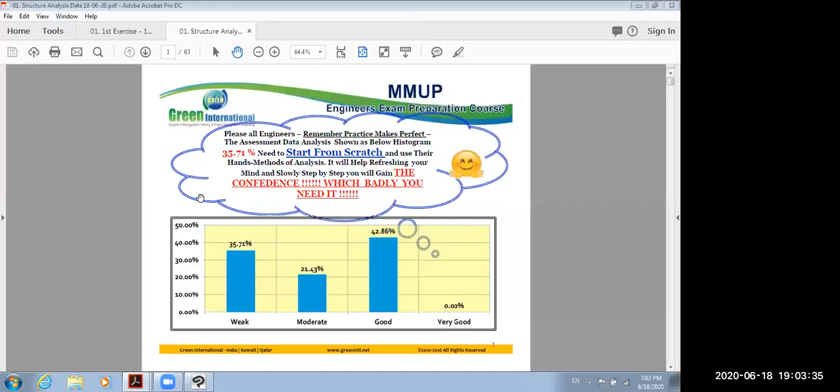I would like to give some, what you call it. Okay, what we have right now, guys, we have on my screen. I have the first exercise. This is the one. Call it first exercise. This first exercise has 16 questions. We need to solve, inshallah, most of them. These are 16 questions we are going to solve.

I told you in the previous class, that's the printed hard copy. I believe all of you have a hard copy now for this exercise. I wish so. What other material are we going to go through? Structure slides. So we have the exercise and we have slides. 01 first exercise and 01 first class session lecture. This is the first one.

And make sure all of you have a notebook, pencil, pen, whatever, and a calculator. Why? We will go through the exercise and solve whatever we can together. I'm going through my screen. I have my pen, my paper, everything here. And we are going to use the slides. Okay, guys? Clear? Please say yes or no. Clear, guys? Let's start. Very good. I am so happy now. Thank you. Let's start, guys, now.

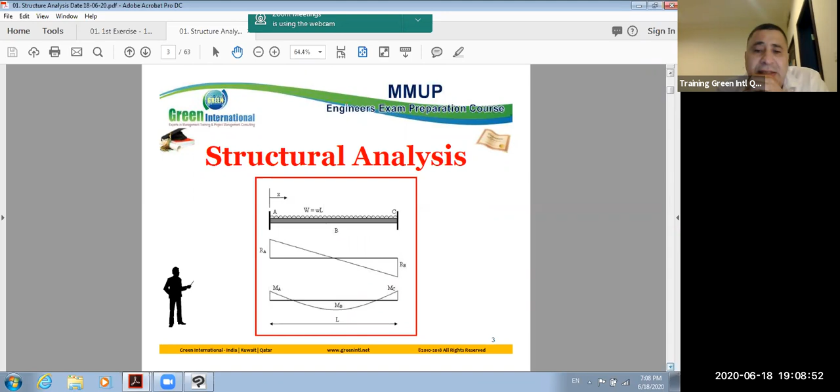Right. Your strategy as a civil engineer, I said in the previous class, I'm going to pass this one. Structure analysis. I am just giving this to refresh your mind. What type of figure do we have? What type of system do we have? We have a fixed end beam, both sides, A and C fixed end. And this is a fixed beam. Okay, very good. Go ahead. Okay, in your mind now, four questions.

Number one, what is structure analysis? Number two, why do you as a civil engineer study structure analysis? A civil engineer without structure analysis is not a civil engineer. Okay. Number three, what are the knowledge areas you should focus on for our exam only? For our exam, we will not go for a master degree in structure analysis. I am going to give you exactly what we are going to focus on.

Number four, what are the structure elements you should focus on? There are these four types of questions. If we answer them slowly one by one, give examples and answer these questions together, you are going to be familiar and refresh your knowledge.

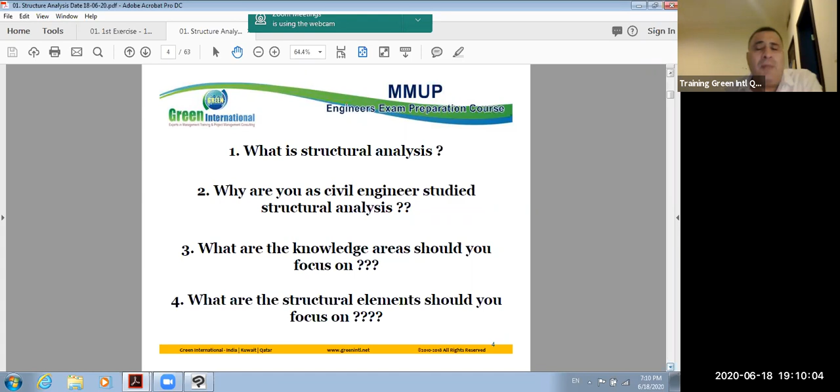Let us see. Number one, your strategy. Don't forget that practice makes perfect. Study on your own and solve using your brain calculation. Don't focus too much on the calculator. Try to enhance your calculation skills, because in your exam the calculator is built into your desktop, and you are going to be in a hurry, always in a hurry.

I don't know if all of you are in the same mood as me. When I'm going for my exam, relax, relax, whatever happens, it will happen. But not all of you are the same. Not every engineer has the same mentality or mood. So from now, exercise how to enhance your calculation skills.

Okay, practice makes perfect. What is your strategy for studying structure analysis, getting the questions answered right and getting the score in your exam? I'm going to repeat it again. Maybe from 4 to 5, even from 4 to 6, questions means a high score. And if all of you solve only these 6 numbers and the project management problems and questions, for sure 100% you will pass.

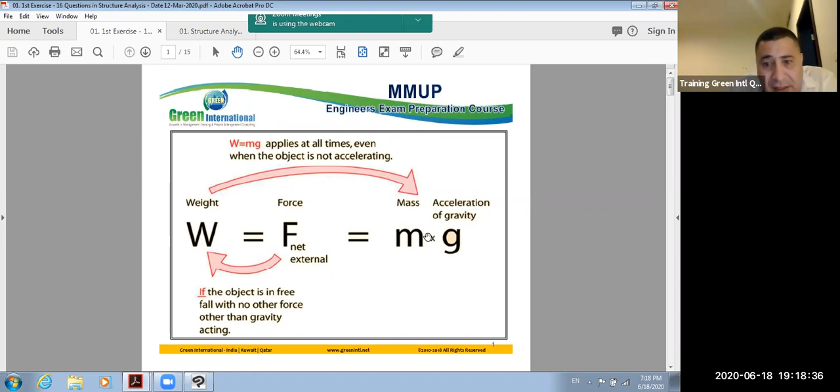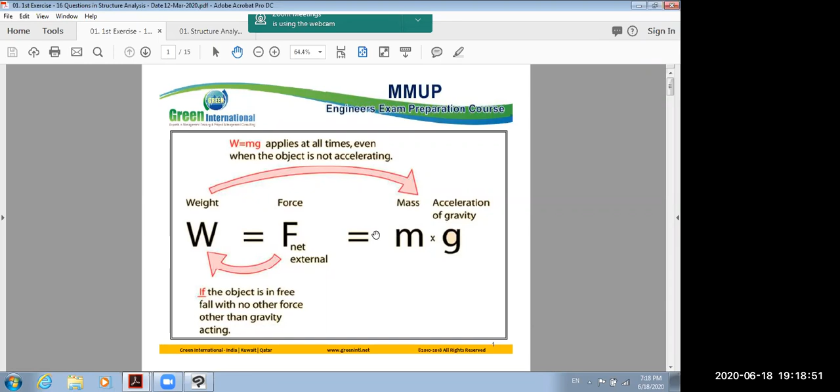Let us go for our exercise. So now we have exercise and we have slides. The first slide is telling you what is the load: weight equal force equal mass multiply acceleration. Try to memorize the formula. Weight equal force equal mass multiply gravity. Try to memorize all the mathematics and the geometry. Okay, question number 1.

Load path is one of the key considerations in structure design, and it is about how to bring the load acting on the building. As I told you, we discuss in this example how the load will transfer from this structure system to the foundation. So now the load path to the building facade, to the ground and the foundation, to the column, to the beam. Take few seconds, guys, and give me the right answer.

By the way, I need all of you to check your score after the session. If we succeed to solve 10, 20, however many questions we answer, try to score yourself. See how many answers are correct and how many are false, and check your score.

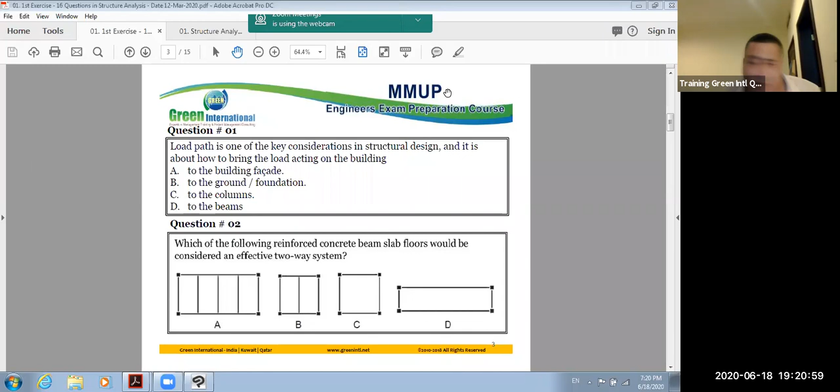Question number 2. Which of the following? Raise hand. Okay, raise hand. Tell me. What is the problem? Shakisa, I am going to unmute. Tell me what is the problem, please. Hello. Shakisa. Hello. Tell me. Okay, no problem. Okay. So now, which of the following?

Number 2. Which of the following reinforced concrete beam slab floors would be considered an effective two-way system? Guys, take your time. We have system A, system B, system C, and D. We have slabs in A. How many slabs we have? 1 slab, 2 slab, 3 slab, 4 slab.

How many beams we have? We have 1 main beam, the second main beam, 2, 3, 4, 5, 6, 7 beams. We have 4 columns. We have in B 2 slabs, and 5 beams. We have in C 1 slab, 4 beams, and 4 columns. We have in D how many slabs? 1 slab and 4 beams.

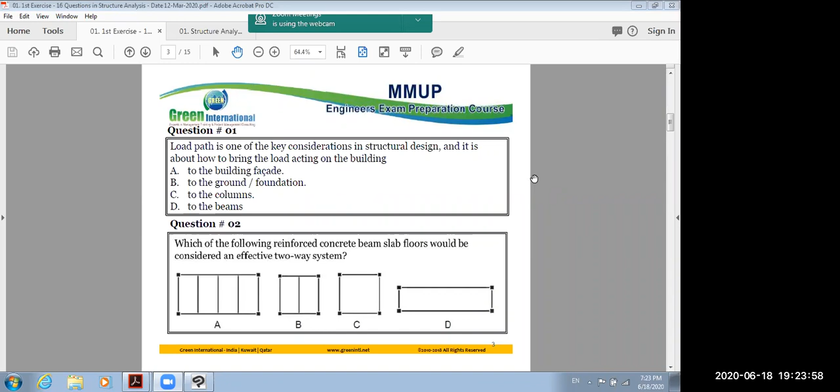Can you hear now? Please type whatever if you are hearing now. If you are not hearing, maybe something is wrong in your system, because I cannot hear you as well. Shakisa, did you hear me now? Please type anything. I am already on my system. Any problems, guys, for all of you? I believe all of you can hear me. Clear here. Okay, no problem. Shakisa, please check in your system and rectify it yourself, please.

Now, okay, very good. Right. So the answer is C. How many score now? 2/2. Very good. 2/2. Okay, let us go for number 3.

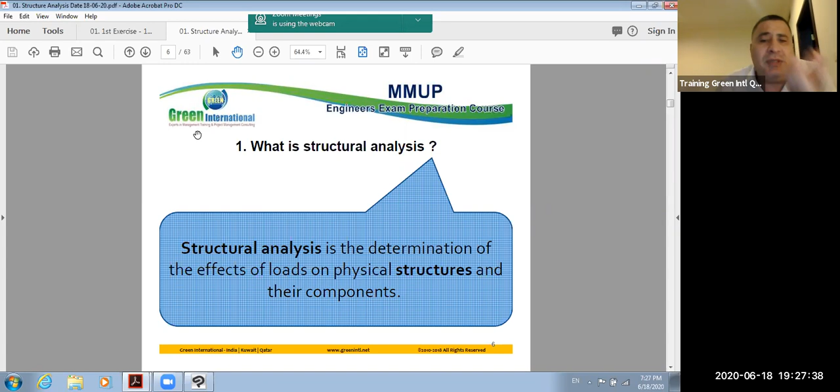Sometimes we have a PEB structure system, and while you have a project, a warehouse, and the system is PEB, you have to get the reaction load from the supplier. If the supplier doesn't have a structural engineer, he will fail to give you the reaction load.

Question number two: why do you, as a civil engineer, study structure analysis? We know now what structure analysis is. Why? Structure analysis is important because it can evaluate whether a specific structure design will be able to withstand the external and internal stresses and forces expected for the design.

Now we will discuss equilibrium and stability. While designing, we need to know the forces acting for sure, 100%. But for PEB structure systems, pre-engineered warehouses, sometimes in the tendering stage they give a particular standard design. During execution, the contract conditions tell you to revalidate the design, and you have a PEB supplier, like Zamil or Kirby or something like that.

You ask him, give me the reaction load, please. He will not give you the reaction load until you sign a contract with him. Anyway, while designing, we need to know the forces. Correct. Very good. Why do you, as a civil engineer, study structure analysis?

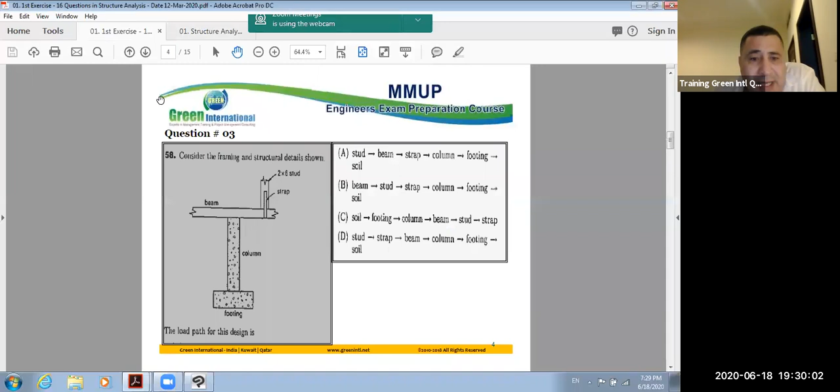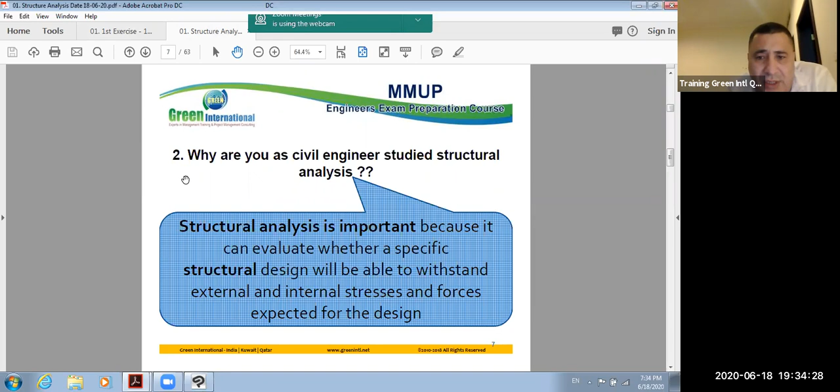Let us see now. Why do you as a civil engineer study structural analysis? Structural analysis is important. We talked about this one. Number 3. Okay, what knowledge areas should we focus on? What exactly is the knowledge area? Question number 1 to question number 2 is structural analysis in general. Now we'll go more specific.

So now, shear force, normal force, and bending moment. 3.1, 3.2: shear forces, normal forces, and moment diagrams. 3.3, statically determinate and statically indeterminate structural elements. We are going to discuss them. Stability of structural elements, which we just started to discuss from question number 2. Deflection and slope of structural elements.

Okay, very good. We'll go for equilibrium. First, let us see what equilibrium is. We will discuss now point number 1, equilibrium and the equations of equilibrium. What's the meaning of equilibrium? Anybody?

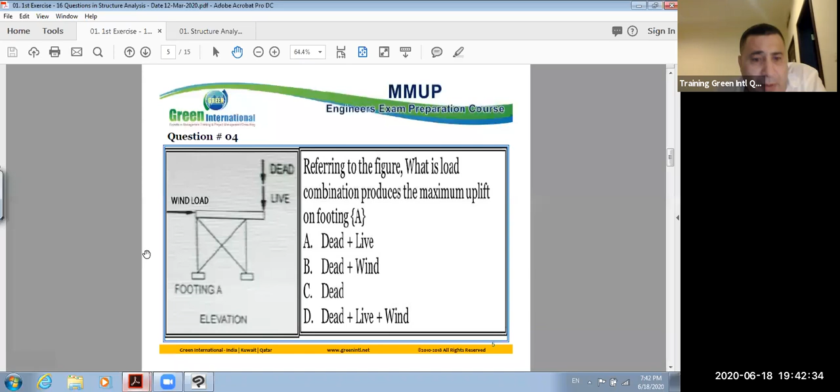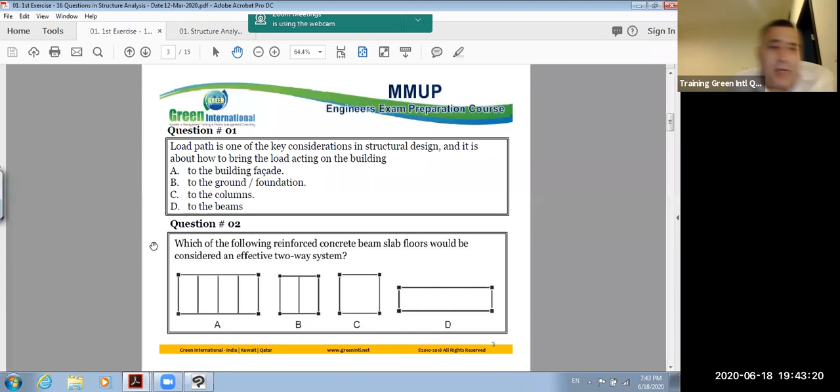So the load path is what? It carries all the weight of the building to the ground. So: to the building facade, to the ground foundation, to the column, to the beams. For sure, 100%, the correct answer is to the ground and the foundation. Okay, guys? Number 1 is clear.

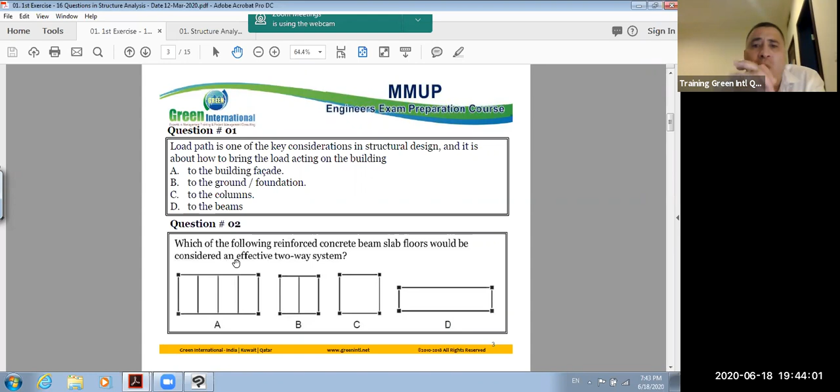Number 2, consider which one is a one-way slab and which is a two-way slab. A slab has length and width. Any slab where the ratio of its length over its width is more than 2, we consider a one-way slab. For example, a slab with 1 meter width and 3 meter length: the ratio is 3 over 1 equals 3. That means this is a one-way slab.

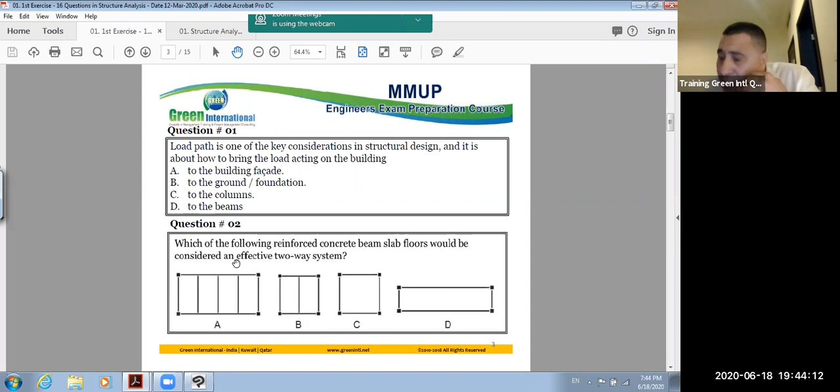Take another slab, 1.8 meter width and 3 meter length. Length over width, 3 over 1.8, is less than or equal to 2. That means a two-way slab. So from A, B, C, D, which one has a two-way slab? As engineers we consider these one-way slabs, and this one a two-way slab. So the answer is C.

I believe now 1 and 2 are clear. Noted? Tamam, alhamdulillah. Okay. Right. Let us go to our slides again.

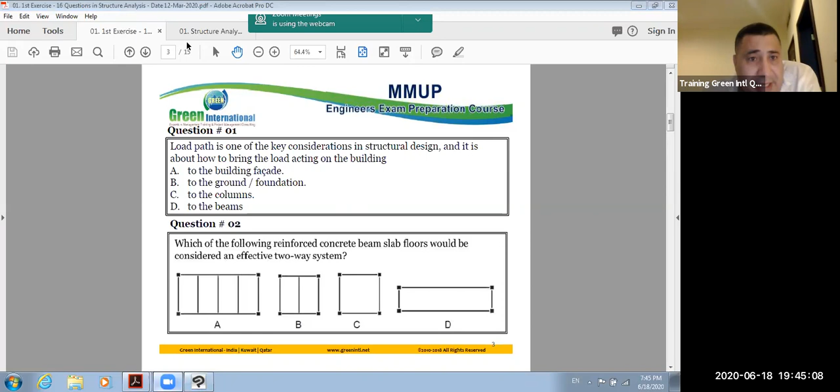Let us go to our exercise. Numbers 1, 2, 3, 4, solved, correct? Number 5, guys. We'll start from number 5.

If all of you solve these questions correctly, an invitation to a 5-star hotel is open now. All of you are invited to a 5-star hotel dinner on me. All of you try to solve this question correctly. I will give you 2 minutes, 13 seconds.

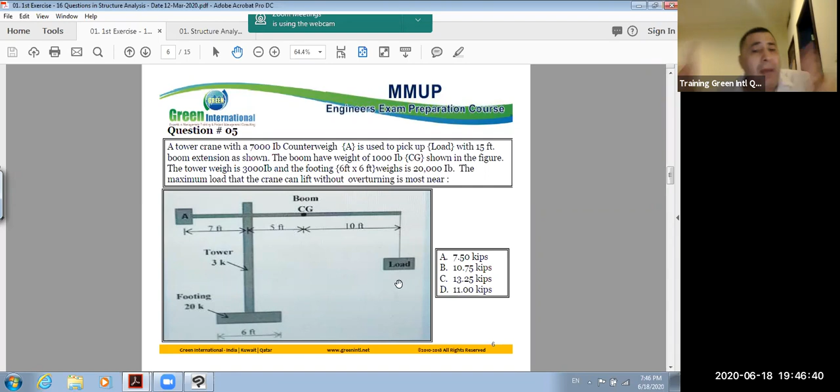Read this question, try to solve it, and tell me what is the maximum load that the crane can lift without overturning is most nearly. Equilibrium, guys, equilibrium, sigma moment at any point should be 0, which I just told you now. Try to solve this question on your own in your notebook. Now, take 2 minutes and 13 seconds. Tell me your answer, please.

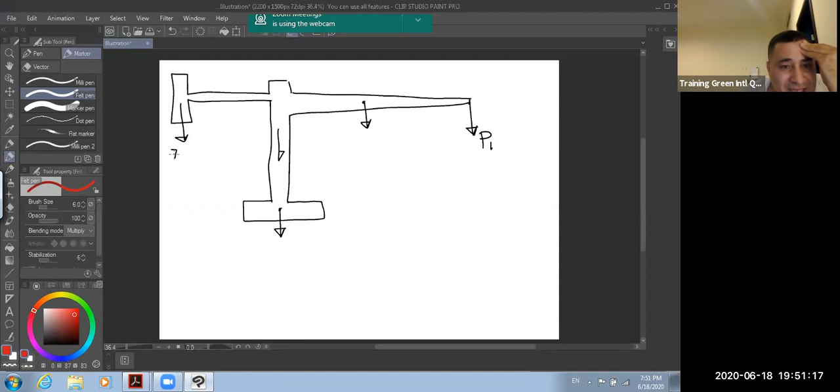Guys, I have a tower crane with a 7,000 pound counterweight. 7,000 pound divided by 1,000, we call it 7 kips. So 7 kips here. This is what we call the counterweight. 1 kip equals 1,000 pound. You have to start now to memorize and refresh: 1,000 pound equals 1 kip. Okay, very good.

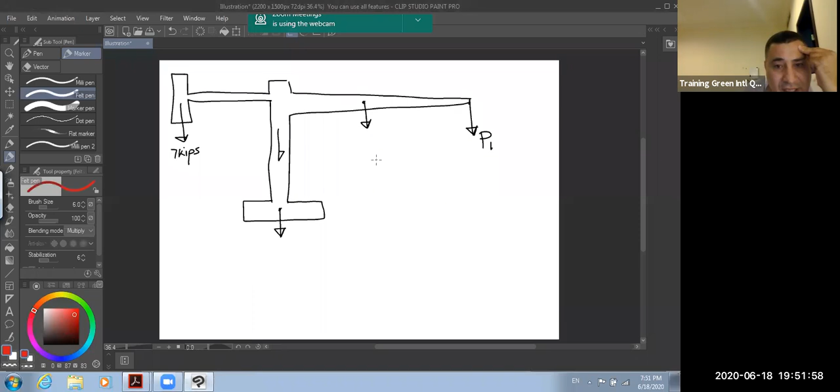And the counterweight is used to pick up loads with a 15 foot boom extension. That means the boom is 15. The CG of the boom is 5 feet away from the post. That means here we have 5 feet. I will check your answer right now. Okay, this is 1,000. 1,000 divided by 1,000, 1 kip. And we have here 10 feet.

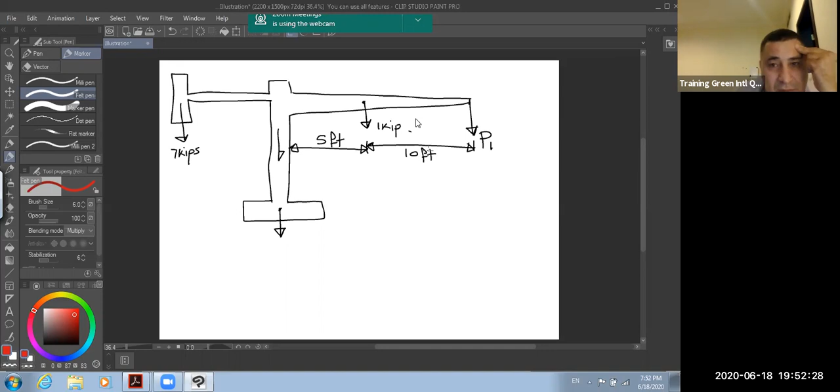Let me check your answer. Can you show the equation again? I will show, don't worry. I will solve this question and I will show you the equation. A is wrong, guys. You failed to get the 5-star invitation from me. That's okay. Let me check the last. D. Oh, perfect, guys. Gobi, yes, this is the correct answer. I appreciate you. Let me solve it for all of you.

We have 1 kip here, and we have P1. P1 is unknown. I need to know it. And the post of the tower crane is 3,000. 3,000 divided by 1,000 gives 3 kips. Here 3 kips. And the foundation is 20,000 pounds. That means 20 kips here. And here is 3 kips.

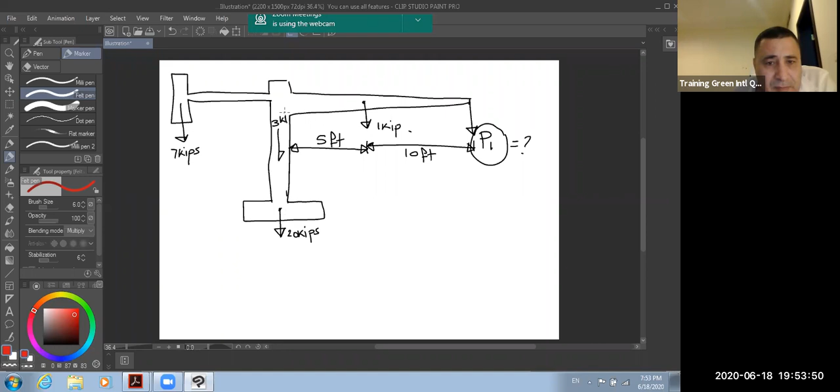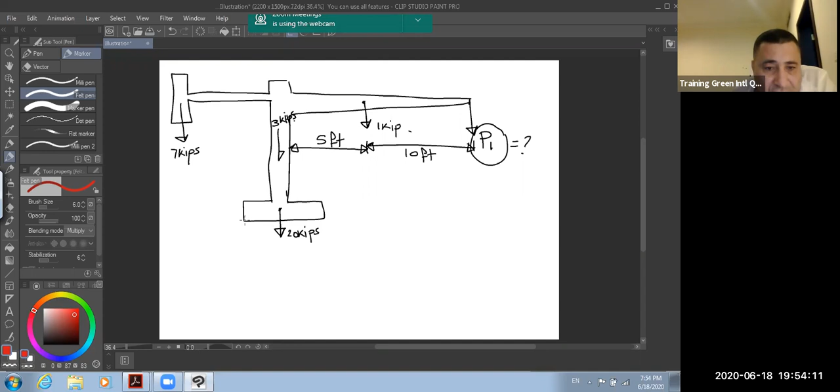And we have 3 points: point A, point B, and point C. What are these 3 points? This is where the foundation contacts the soil. In your opinion, due to this load, what is the overturning point? This load will exceed the limit. The system will overturn in this direction. This is the way of the overturning movement. The whole section will collapse in this direction.

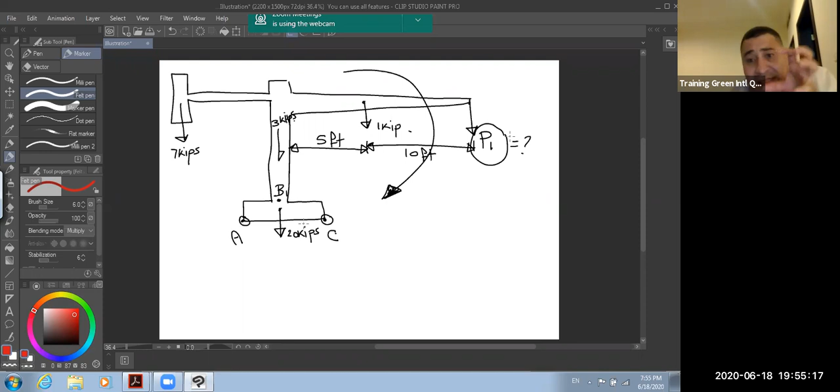Where is the nearest point for overturning? Point A, or point B, or point C? Please give me your opinion in the chat now. Due to this load, the whole system will fail in this direction. What is the arrow now? C, correct. The nearest point where this system will overturn is point C. This is the overturning point.

The system can fail here, yes, but due to what? Failure in the system. If the connection between the post and the foundation is not designed to resist the load, maybe failure happens here. But he told you overturning. He is more specific in the question. Overturning means what? Equilibrium. Equilibrium where we will take a level.

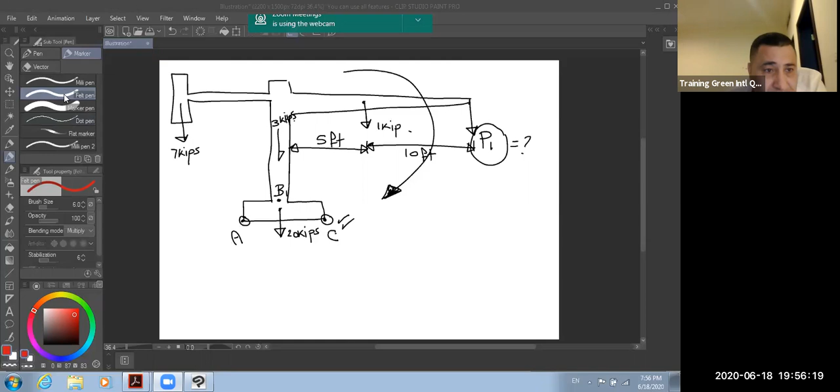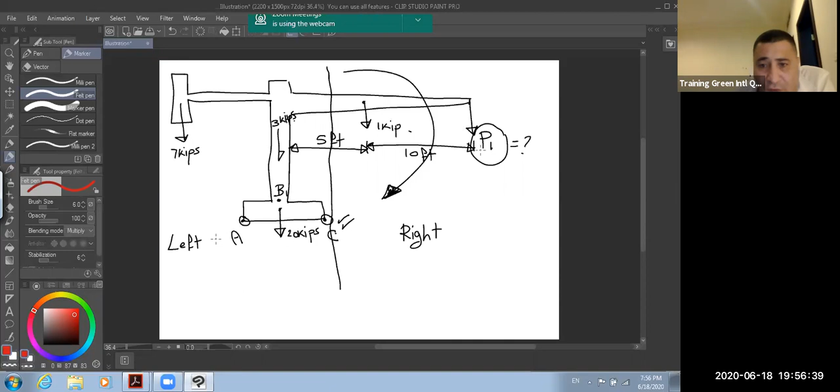Equilibrium, that's meaning what? Here is a weight. Whatever forces in the right hand, and the left hand. You have forces in the right hand and you have forces in the left hand. Correct? This is the right hand and this is your left hand. You have P1 and 1 kip in this side. And you have 7 kips and 3 kips and 20 kips in this side.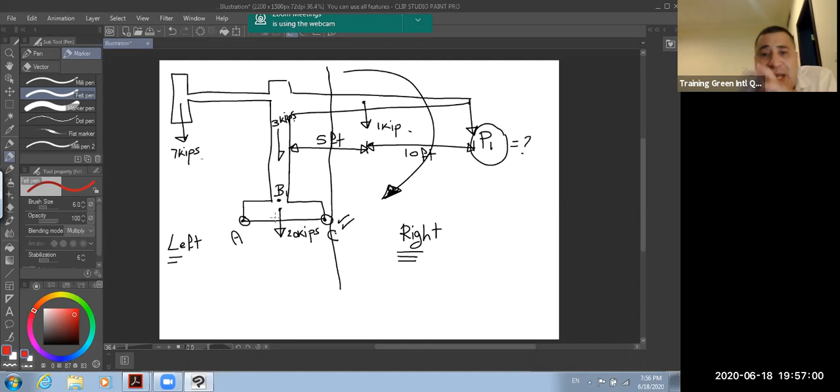Means what? The resultant of the moment due to these forces at point C should be 0. Means B1 moment in this direction. The first moment is B1 multiplied by the distance, which is 12: 10 plus 5 minus 3, because this distance is 3 feet. 15 minus 3 is equal to 12. So B1 multiplied by 12. What else? We have 1 kip multiplied by 5 minus 3, equal to 2. This is the summation of the right hand.

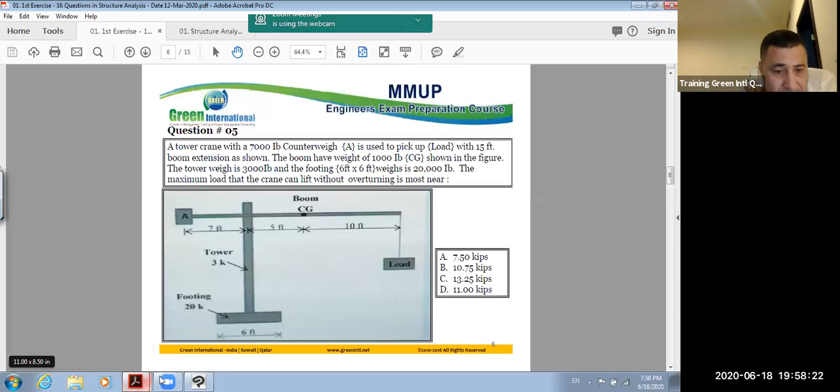What is the left hand? Left hand we have 7 multiplied by this distance, which is 7 feet. Let me check. 7 feet plus 3 is 10. So 7 multiplied by 10. Correct. Number 2, 3 multiplied by 3. What else? 20 multiplied by 3. This is the moment from the left hand side.

Both should be 0 to have equilibrium. Means the right hand and left hand should equal each other. From this equation I can get B. The equation is telling you B1 multiplied by 12 plus 2 equals 70 plus 23 multiplied by 3. B will equal 11.41 kips. If you calculate now, all of you, you will find out that B equals D. Correct. The answer is D. Very good. You will find it 11.41.

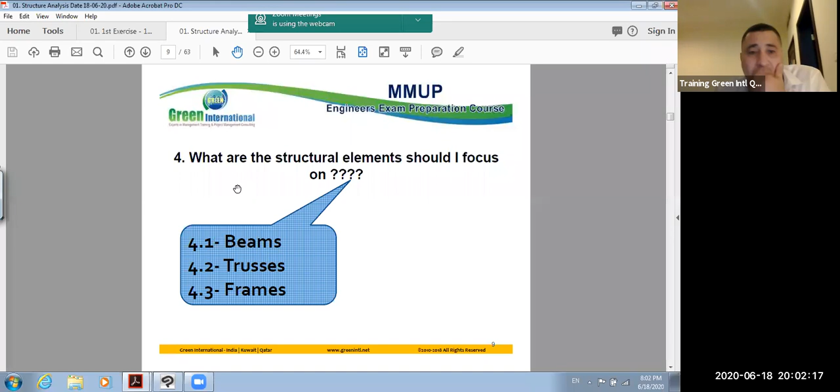Again, we'll come back to our structure. So now, what are the structure elements I should focus on? Beams, trusses, frames. Today we'll discuss beams. And we'll discuss shear forces, normal forces, and bending moment diagrams, statically determinate and statically indeterminate structure elements.

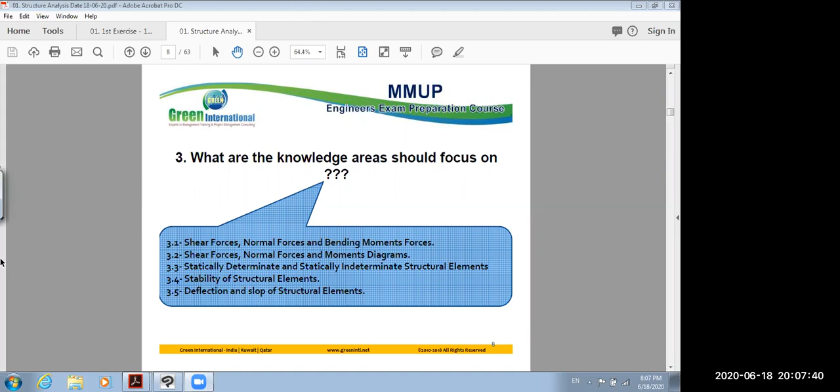Hello guys, welcome back. Let's start now. We'll discuss beams and shear force, normal force, and bending moment diagrams. Okay.

First, loads. We discussed loads acting on a system. When the loads act on beams, we have a standard assumption for all the elements. For example, supports. The first support we are going to discuss is the hinged support. A hinged support is indicated like that. This is the indication of a hinged support. That means we have a support.

We call it hinged support, or pin support. Due to the load, this is a hinged support as I told you, and this is what we call roller support. Our first structural system you are going to study is the beam. This is a simply supported beam.

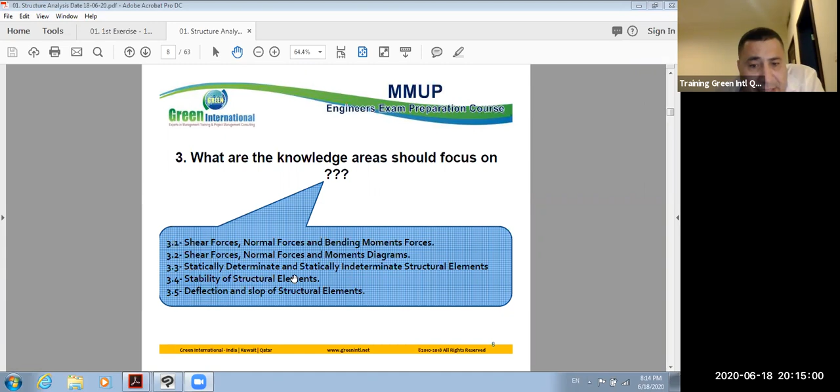Now we discussed reactions, types of supports for a simply supported beam, equations of equilibrium, unknowns. If the unknowns equal the equations of equilibrium for any structural system, we call it statically determinate. That's the definition of statically determinate and statically indeterminate structural elements. I will give another example, slowly, to refresh all our knowledge.

We talked about two supports. Now the third support. We will discuss only three types of support. The third one is the fixed end support. What does it mean? A fixed end cantilever beam will be like that. So we have hinged, roller, and fixed end.

Due to any loads acting on the system, P, we have 3 reactions here: YA, XA, and the moment MA. This moment, this force X, and this YA force are 3 reactions. So now I have 3 reactions.

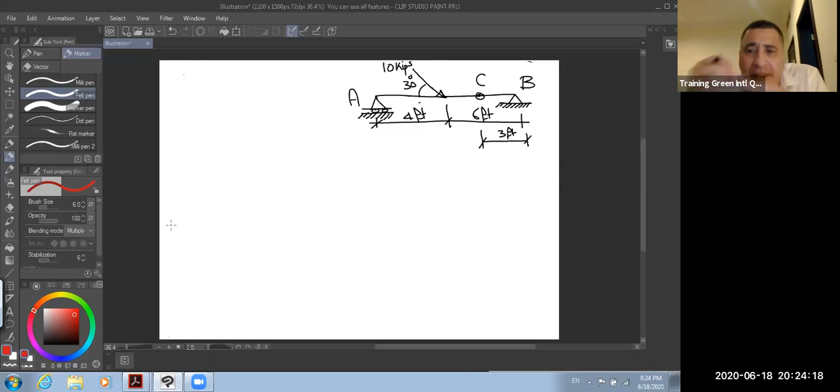I need section C. I need all of you with me now. Calculate the normal force at section C, the shear force at section C, and the bending moment at section C. Okay, to solve these, we have to get all the unknowns. I have reactions now. Okay, very good.

First of all, this inclined force. What does inclined force mean? It means I have to decompose it in these two directions. Anyway, this is 10 sine 30, and here is 10 cosine 30. If you have any inclined force P with angle theta, this component is P sine theta, and this component is P cosine theta.

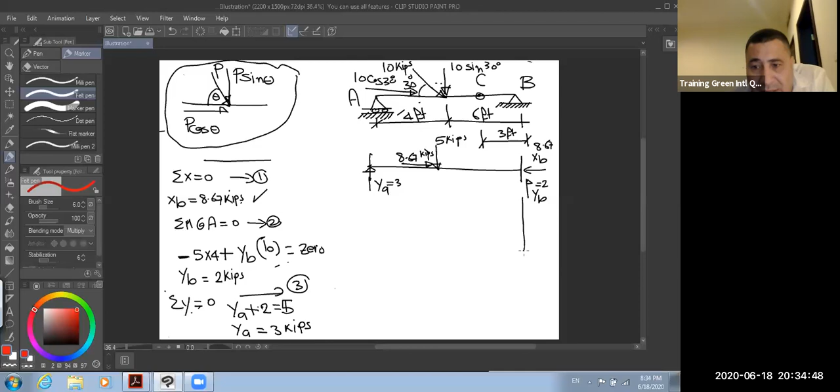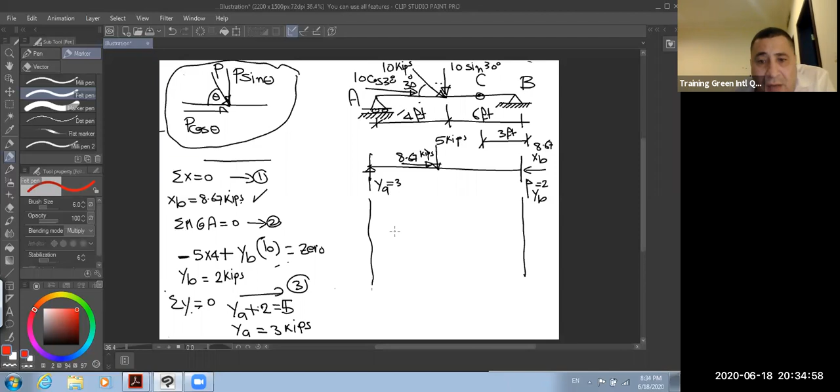Now I am going to draw the diagrams, and from these diagrams I get the forces. First diagram is the normal force diagram. Always start drawing from the left hand side.